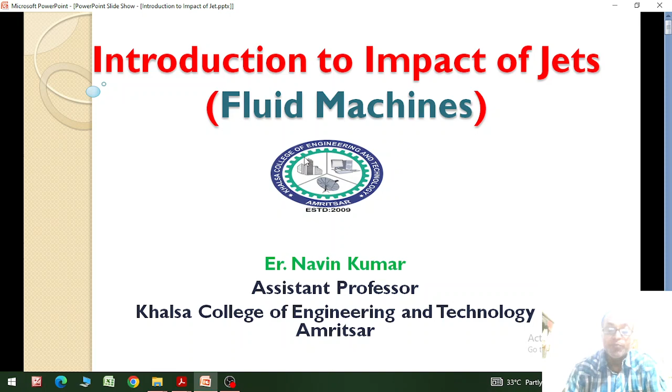Generally we deal with the dynamics of machines. What does it mean? Dynamics deals with power. So dynamic machines means power machines which receive energy from the flowing fluid in the form of momentum and convert the change of momentum into useful work. Our turbo machines like turbines, pumps, compressors - these are the turbo machines and devices that we already know from various subjects we have studied till date.

These are devices in which energy is transferred by the dynamic action of moving blades, either to or from a continuous flowing fluid. So turbo means which spins or whirls.

Similarly, in the impulse turbine, a high velocity jet from the nozzle strikes a series of suitably shaped buckets or vanes, sometimes we call them depending upon shape, fixed on the periphery of a wheel. The wheel gets resulting momentum and it gets rotated, and thus we get mechanical energy from the turbine.

So if you go through this background, you see the turbines and other energy producing devices, or sometimes consuming devices like pumps and compressors. So how does the energy transfer take place from the fluid to the machinery? This is possible with the help of energy transfer, and the initial thing that occurs, the first part involved in this interaction, is the blade and the jet of water.

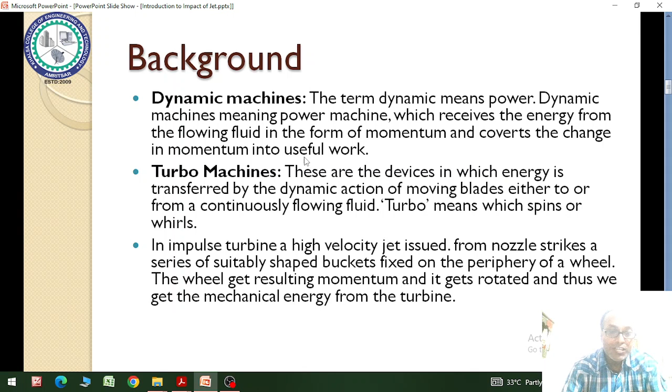Okay, so we will move to the next slide.

So there are various types of machineries depending upon configuration, like open and closed machines. Open turbo machines are those which deal with an indefinite quantity of fluid, like windmills, propellers, etc. These machines come under the category of aerodynamics.

Secondly, enclosed turbo machines are those which deal with a finite quantity of fluid passing through a casing in unit time. Based on absorption and production of power: those which absorb power to increase the fluid pressure or head, for example pumps, duct fans and compressors; those which produce power by expanding fluid to a lower pressure or head, that is all the turbines.

Based on the type of fluid handled, further classifications are: those which handle water, that is pumps and hydraulic turbines; those which handle steam, we call steam boilers; those which handle air or gas, that is fans, compressors and gas turbines. So these are the various types of turbo machines available, and these are the general classifications where machines deal with fluid - gases, air, and liquid, that is water.

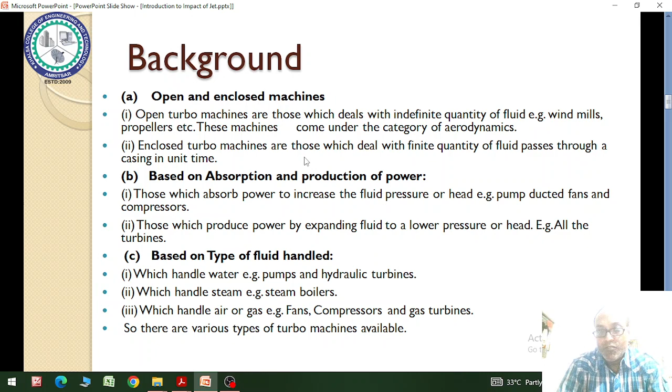So when we talk about the principle on which the impact of jet works, the principle behind it comes from Newton's second law. What it says: the change of momentum is directly proportional to the force. With the help of this principle, we are able to calculate the force that the jet applies on the

blades or vanes. These forces are called dynamic forces exerted by the jet, and this force is due to the change in momentum of the jet as a consequence of the impact.

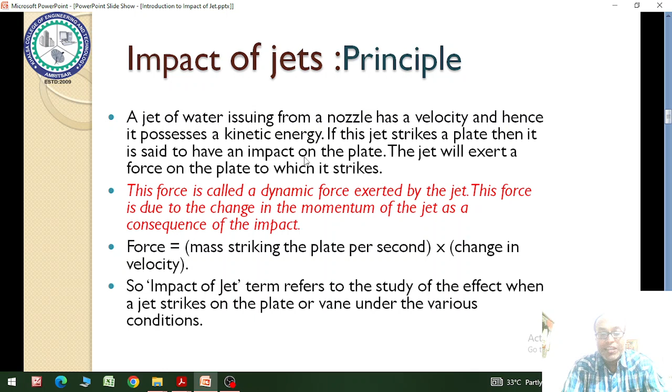So how can you find the force? Force is just equal to mass striking the plate per second - this we call the mass flow rate in kg per second - multiplied by the change in velocity. Change in velocity means initial velocity minus final velocity. So the term 'impact of jet' refers to the study of the effect when a jet strikes on a plate or vane under various conditions. These various conditions we will see in the next slides.

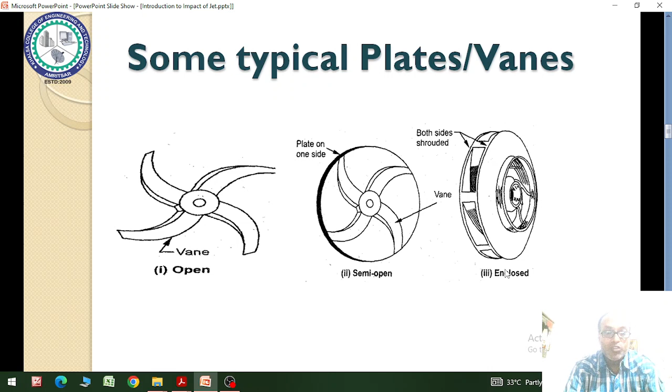These are some typical vanes and plates on which the impact of jet takes place. The first configuration is the open type impeller of a centrifugal pump. This is the semi-open impeller, and this is the fully closed impeller. Here we've taken examples to depict the various shapes of vanes of turbo machines.

Before moving forward, for calculating the forces and the work done on the plates or vanes, we simplify the complex real situations to make our calculations easier. So we have certain assumptions for the impact of jets.

The first assumption is incompressibility. The fluid should be incompressible when we talk about the impact of jet. We know water is an incompressible fluid, meaning the density should not change, so it is perfectly suitable. Whenever we talk about the impact of jet, we are talking about fluids which are incompressible, meaning liquids. We will not talk about gases here because gases are compressible fluids.

The next assumption is that the flow should be steady, meaning it should not change with time, which simplifies our engineering calculations for designing things. Second, there should be no viscosity. The fluid which strikes the plate should have no viscosity, meaning there should be no internal friction. There should be no friction there; if it is present, we neglect it.

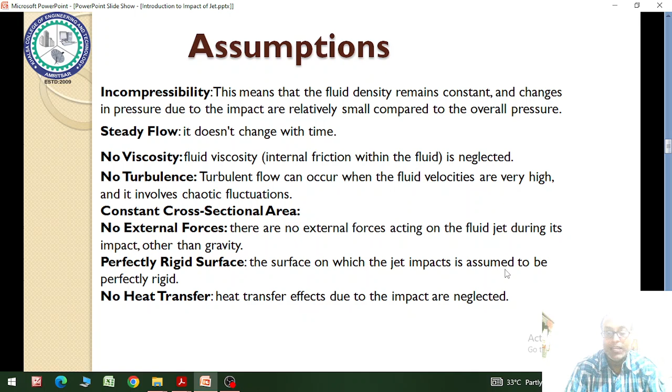The last assumption is there should be no heat transfer. Heat transfer due to the impact of jet is neglected. We know there is some friction and heat generation in reality, but since we assumed no viscosity, there is no internal friction, and so there is no chance of heat generation either. You must remember these assumptions while we do calculations later.

So, impact of jet on a stationary flat plate. Our first and simplest case is the impact of jet on a flat surface. Consider this flat surface and the nozzle through which the water jet comes and strikes the plate, which we assume is a flat plate.

After striking the plate, the water gets deflected in all directions—here we can see two directions, upward and downward. Let us consider the cross-sectional area of the jet as small 'a', and 'v' as the velocity of the jet.

'm' is the mass of water striking the plate per second, and the mass flow rate is rho times a times v, where rho is the density of water in kg per meter cube. The force exerted by the jet on the plate is found as the change of momentum per second, that is the mass of water striking the plate per second multiplied by the change in velocity.

So m is the mass flow rate, v is the initial velocity, and the final velocity in the direction of force is 0, because in that direction (say x) there is no jet velocity, only in the y direction is there velocity. So final velocity is 0 and initial velocity is v, giving m times v, and since m is rho times a times v, the force becomes rho a v squared. So we can find the force as rho a v squared in the case of a flat plate.

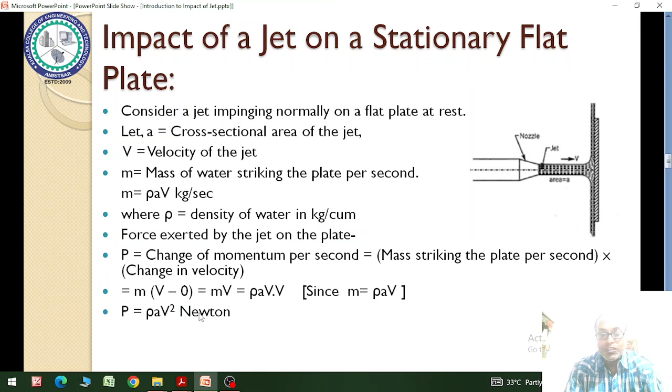So our next case is the direct impact of a jet on a moving plate. When the plate is also moving, there will be a relative motion between the jet and the plate. If v is the velocity of the jet and u is the velocity of the plate, then the relative velocity is v minus u, since v will always be greater than u.

So how do we find the force exerted by the jet on the plate? We use the same formula, that is change in momentum, mass flow rate into change in velocity. So it is rho a, but instead of v square, we take v minus u square.

Since the plate is also moving, we find the work done by the jet on the plate per second as force multiplied by the velocity of the plate. So work done is rho a (v minus u) square, that is the force, into u. We express work done per second because we are multiplying force by velocity, not distance, so the unit is Newton meter per second or Joule per second, which we also call power.

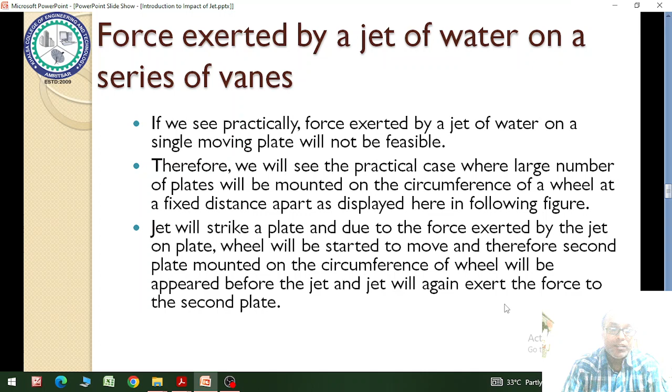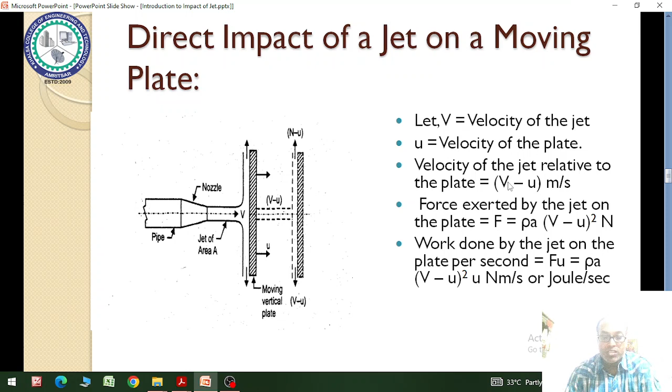So always more than one vane or bucket is there, and we have to study the effect of the water jet on a series of vanes. The only change when we talk about a series of vanes is in the mass flow rate. In place of rho a times v minus u, we consider rho a v, because in case of series of vanes we assume there is always a vane in front of the jet.

Once the jet strikes a particular plate, it moves away and the next plate comes in front of the jet in no time. This is an assumption we take. So the only change in calculating forces and work done is in m dot, the mass flow rate, which we consider as rho a v, not rho a v minus u. So in case of series of vanes, we consider the absolute velocity, not the relative velocity.

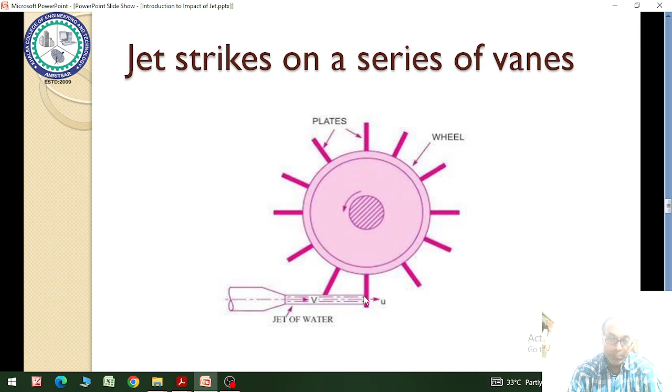So the work done formula is Fx equals rho a v into v minus u. This is the mass flow rate, the mass of water striking the series of plates per second, into initial velocity minus final velocity. The initial velocity is the relative velocity, v minus u, and the final velocity is 0. So the formula is rho a v into v minus u.

So students, you must remember this particular point: when to consider the mass flow rate, and what to consider in the mass flow rate in case of a single plate versus in case of series of plates.

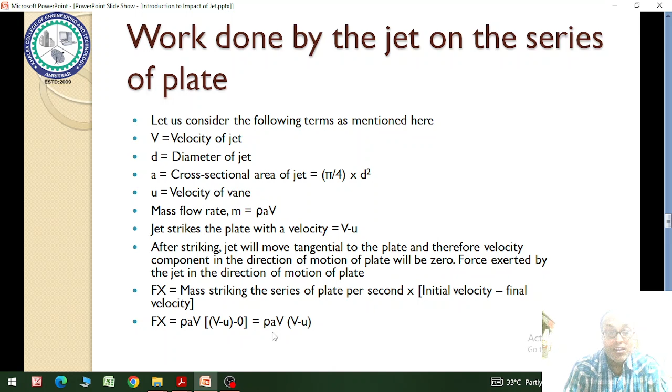Our next part is to find out the efficiency. Once you know the power, you can find out the efficiency. How can we find the efficiency of the jet? You're all familiar with the simple formula: efficiency equals output upon input. So what is the output? The work done that we found just before, that is force into distance moved per second. Distance moved per second is nothing but the velocity.

So work done per second by the jet is Fx into u, and Fx in case of series of vanes is rho a v into v minus u. This is the force multiplied by the distance moved per second, that is u. So from this we get the work done per second as the output. This is our output. Next is the kinetic energy of the jet.

How can we find kinetic energy? We all know the formula, half mv square. So here kinetic energy of the jet per second - it's not just kinetic energy, it's half mv square. So half m, what is m? M is the mass flow rate, that is rho a v, multiplied by v square. So what are we getting ultimately? It is half rho a v cube.

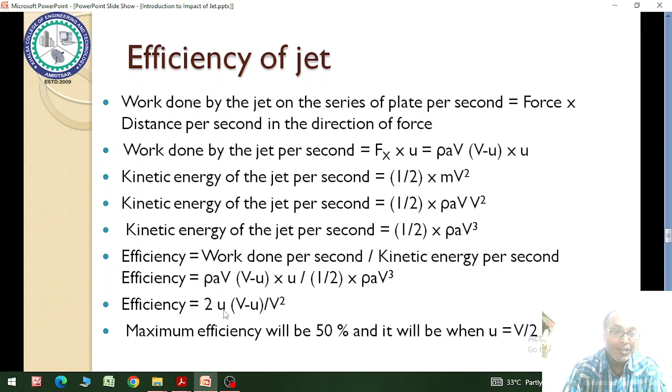Next we will see the most important part, that is the general case - the velocity triangles. This is the velocity triangle on a typical curved vane: one is the inlet velocity triangle and the other is the outlet velocity triangle. In velocity triangles there are a few important terms you must know. The first is the velocity of the jet, so velocity of jet is v, represented by the triangle side AC.

Next is v1, the velocity of jet when it is leaving the vane, represented by EG. So this is the initial jet velocity v, and this is the final jet velocity at the outlet, that is v1, represented by EG. Similarly, u1 and u2 are the velocities of vanes, represented here by AB and FG. This AB line represents the vane or blade velocity at the inlet. Similarly, this FG arrow represents the blade velocity at the outlet. So what are the two velocities we have understood right now? First is the jet velocity at inlet and outlet, and similarly the blade velocities at the inlet and outlet.

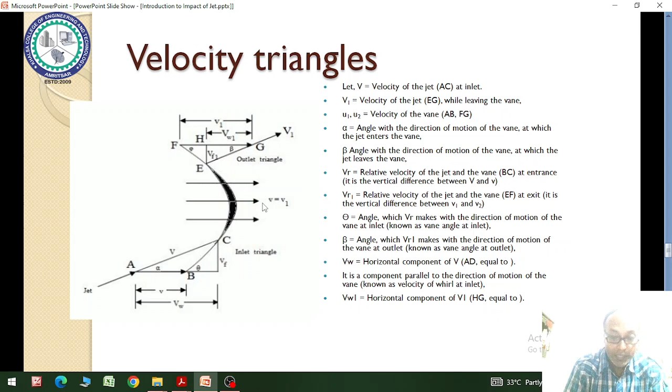To understand this, any velocity triangle has three main velocities, and this is the basic equation for the velocity triangle: C is the vector sum. The absolute velocity C is the vector sum of blade velocity U and relative velocity W.

This symbol C for velocity is used in the European system, and V for velocity is used in the American system. So if you go through American books, you will find the velocity of jet represented by V, and if dealing with European books, velocity is represented by C.

So this is the absolute velocity V, this is the blade velocity, and this is the relative velocity. The absolute velocity is the sum of relative velocity and blade velocity.

You must remember this expression. With the help of this expression, you will always be able to correctly mark the direction of the velocities, whether it is positive or negative, upward or downward. It's important to remember that the absolute velocity is always a vector sum of blade velocity and relative velocity.

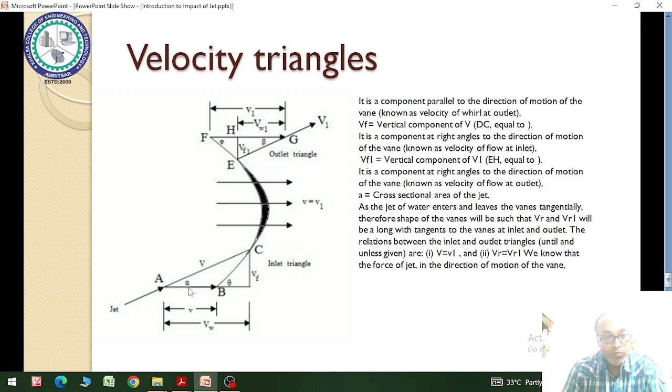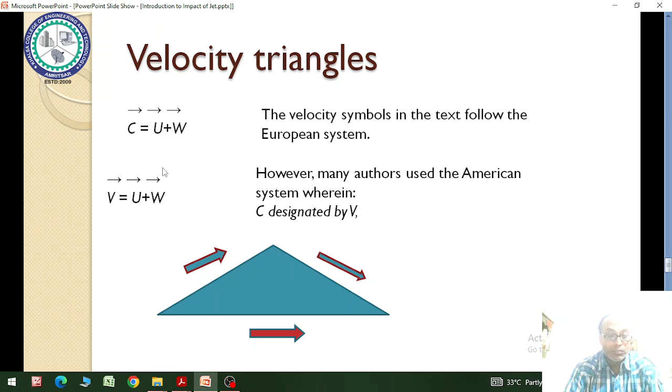So again, the various components of the velocity triangle are explained here. Whether the direction of this whirl velocity will be positive or negative all depends upon this particular equation: the absolute velocity is the sum of relative velocity and blade velocity. So this was all about the impact of jet topic that we have discussed.

Next we will have some certain questions and answers you might have in your mind. So let us deal with the questions.

The first important question that comes from this particular impact of jet chapter is: point out the significance of the word 'free' in impact of free jets. Students, you must be able to answer this particular question.

The second question which generally arises from this chapter is to define the term impact of jet. This question is slightly easier to answer, and I hope you all will be in a position to answer it. We will discuss this later in the class.

So what are the assumptions of the impact of jet? We have already discussed this in detail, so you must be able to write it down if asked. What are the various assumptions we take in case of impact of jet, and why is it important and necessary? In certain studies you have assumptions, and you know why they're kept while doing experiments or derivations, because it is not possible to deal with complex situations, and all practical situations are very complex.

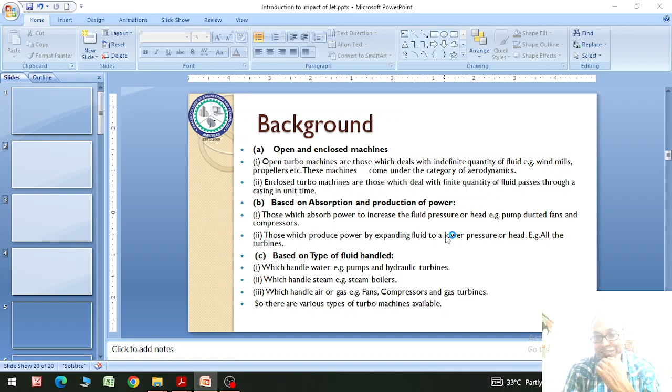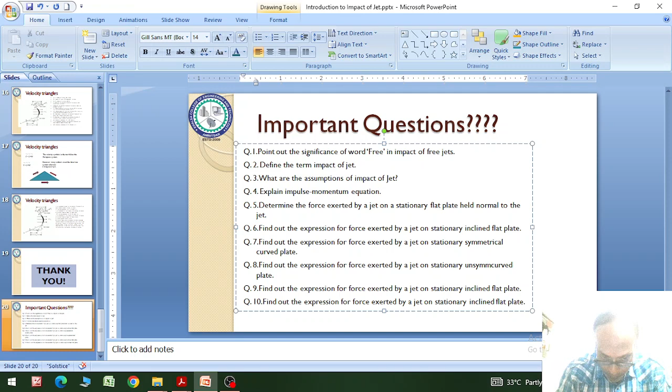Our next question will be stationary curved plate, unsymmetrical type. So the first is symmetrical and the other is unsymmetrical. Unsymmetrical means the angles at inlet and outlet will be different, so you have to take different angles.

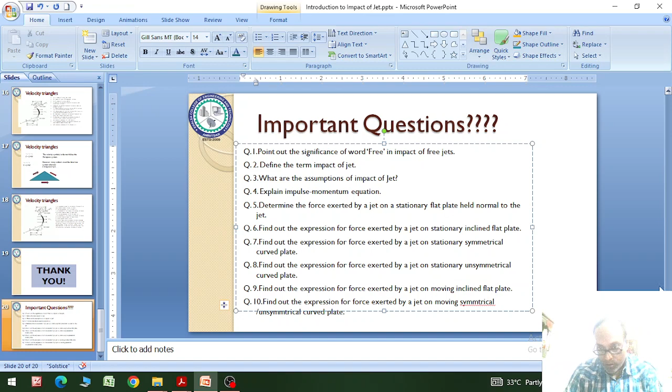And the last one is, instead of stationary, you consider it as a moving inclined flat plate, and the next one is when the jet strikes a moving curved plate, not flat but curved, moving symmetrical curved plate, and you can similarly find it for unsymmetrical curved plate. These are the changes we have done here.

If you have any questions, or find any difficulty with these questions, you can write in the comment box and I will answer your queries. Similarly, apart from these, if you have any other questions in mind, you can ask those too. I hope you have understood the basics of impact of jet.

Impact of jet, and this particular topic has certain other areas of application, such as turbines and pumps, which are used for energy generation. Turbines are used in power plants, turbines are used in aviation systems as gas turbines, and in steam turbines in ships. So it has various applications.